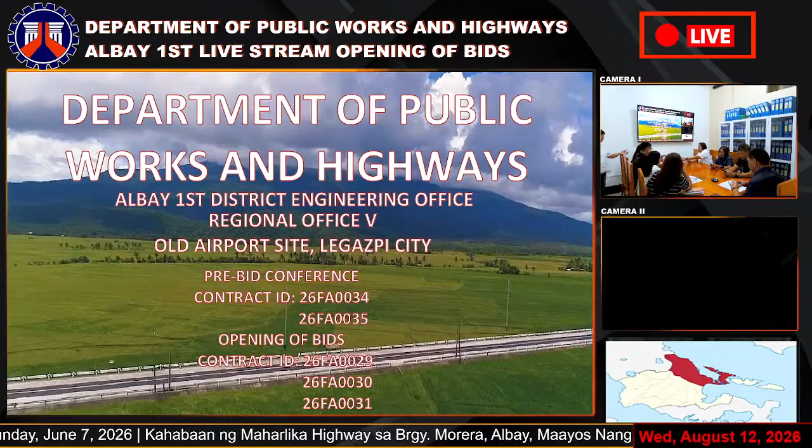Since we already have a quorum, we now start our activity. This is the opening of bid for 3 contract items. Before we open the bid box, let me first read to you the result of the eligibility check.

This is for contract ID 26FA0029. Contract name: CSSP BIP Multipurpose Building, Facilities to Support Services - Construction of Multipurpose Building, Barangay Hall, Barangay San Bernardo, Tiwi, Albay, with coordinates 13.43092 north latitude and 123.65638 east longitude. The location of the contract is at Tiwi, Albay. Based on the evaluation of the legal, technical, and financial capabilities as indicated in the contractor's information as recorded in our computerized registry of contractors for civil works, and the requirements of the above-mentioned contract as indicated in the contract profile submitted by DPWH Albay First District Engineering Office, we find one or a single bidder eligible to participate in the bidding for this contract.

This is Omega Contracting and Development Corporation. So this is the result of the eligibility check, meaning we only have one bidder, a lone bidder. So let me now open the...

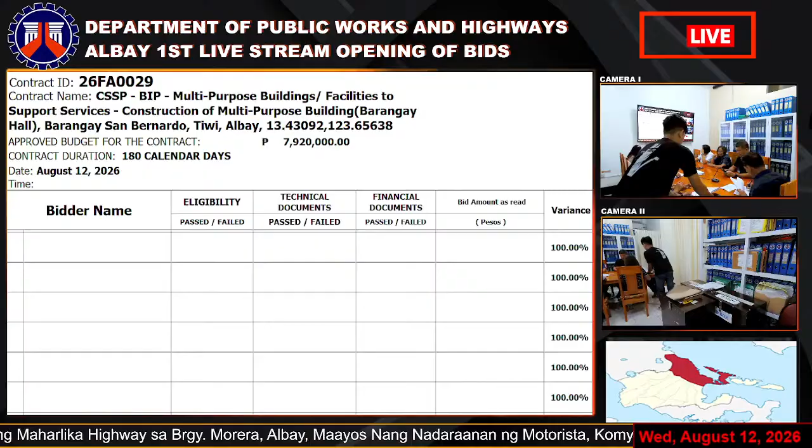We now open and read the technical proposal submitted by the lone bidder. Go ahead, copy of the bidding documents for contract ID 0029 with contract name CSSP BIP Multipurpose Buildings, Facilities to Support Services, Construction of Multipurpose Building, Barangay Hall, Barangay San Bernardo, Tiwi, Albay, coordinates 13.43092 and 123.65638, with the ABC of 7,920,000 pesos. Contract duration 180 calendar days. Date of opening August 12, 2026. Time starts at 10:19 a.m. The lone bidder is Omega Contracting and Development Corporation.

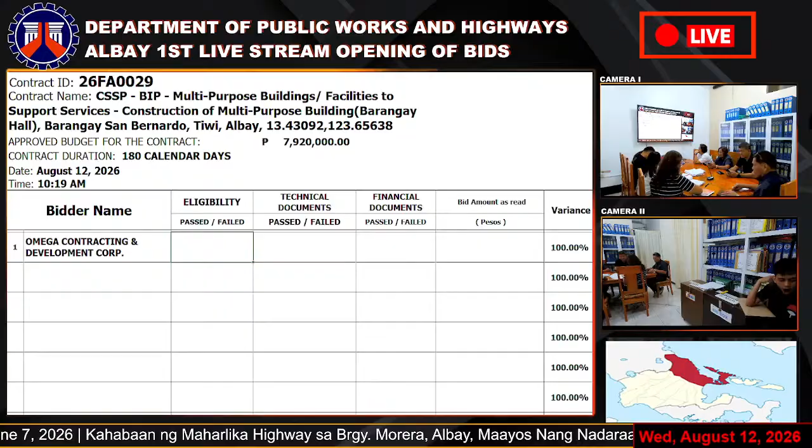PhilGEPS registration. Certificate of Incorporation. Mayor's permit. Tax clearance certificate. PCAB license. AFS and annual income tax return submitted to EFPS. List of ongoing contracts. SLCC with attached notice of award, certificate of completion, certificate of turnover and completion, and acceptance. From BSB, its organizational chart. List of personnel with their qualifications. Key personnel committed to work on the contract.

Project manager Omar C. Octemia and another. Project engineer Maria Lorraine Satueto Octemia, signed and authorized, PRC license and PE accreditation. Materials engineer Kimberly Barsaga, signed and authorized, PRC license and ME accreditation. Safety officer Christian J. Opemia, signed and authorized with certificate. Foreman Arnel Montuya.

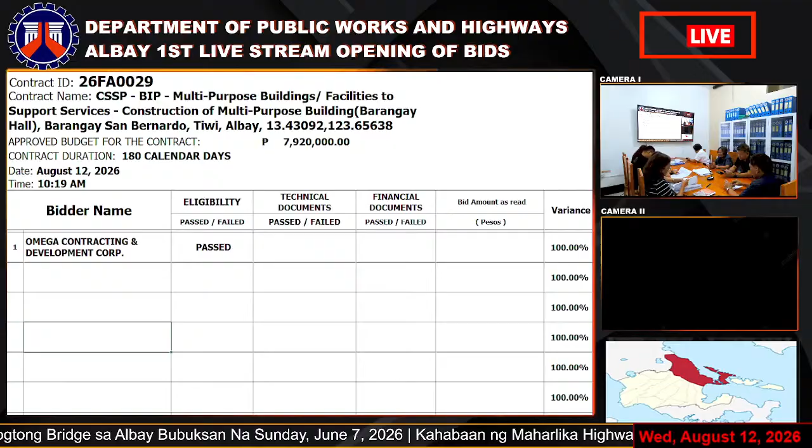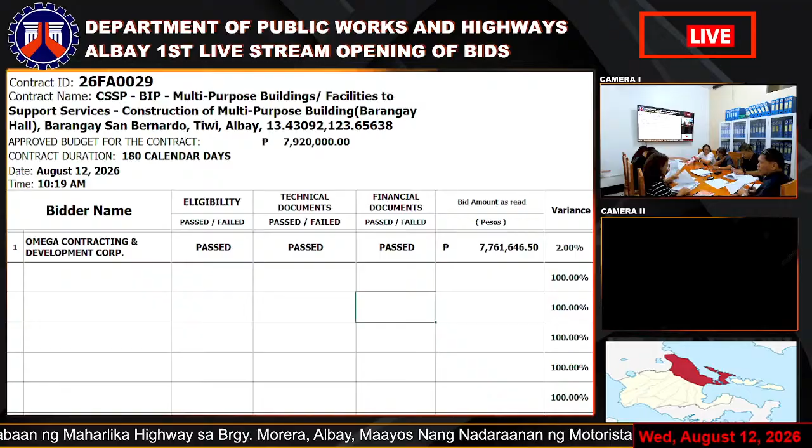Again, the result as read for this contract is still subject to further bid evaluation and post-qualification. So we now continue opening the second contract, Contract ID 26FA0030.

Let me read to you first the result of the eligibility check for this contract. Contract ID number 26FA0030, contract name OO1 Network Development Program, Road Widening, Secondary Road, Daang Maharlika Junction, Legazpi, Santo Domingo, Tabaco, Camarines Sur Boundary Road, K0564 plus 454 to K0565 plus 000. Location of the contract is Malinao, Albay.

Based on the evaluation of the information about legal, technical, and financial capabilities as indicated, the contractor's information of the bidders as recorded in our computerized registry of contractors for civil works, and the requirements for the above-mentioned contract as indicated in the contract profile submitted by DPWH Albay First District Engineering Office, we find 3 bidders eligible to participate in the bidding for the contract: Number 1, Sunro Builders Incorporated; Number 2, RMH Construction and Supply; and Number 3, 8AR Construction Development Corporation.

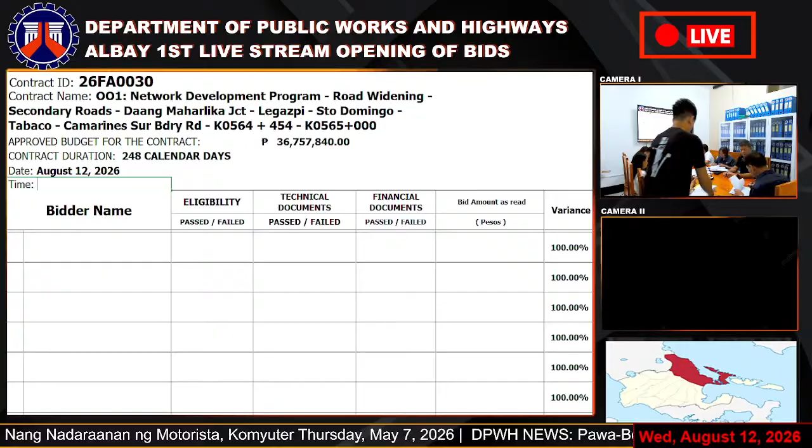So let us now open and read the first envelope. Ma'am Cha, go ahead po. Yes, sir, thank you. Opening of the bidding documents for the contract ID 26FA0030.

For the contract name OO1, Network Development Program, Road Widening, Secondary Roads, Daang Maharlika Junction, Legazpi, Santo Domingo, Tabaco, Camarines Sur Boundary Road, K0564 plus 454 to K0565 plus 000, with an ABC of 36,757,840 pesos. Contract duration 248 calendar days. Date of opening August 12, 2026. Time starts at 10:29 a.m.

First bidder is RMH Construction and Supply. From JEPS Industry: DTI, Mayor's Permit, Tax Clearance Certificate, AFS, Annual Income Tax Return submitted to EFPS, List of ongoing contracts, SLCC with attached notice of award, NTP, contract agreement, final acceptance, inspection report, COC, and certificate of acceptance. Form bid as D, signed and notarized. Organizational chart, list of personnel with qualification data, affidavit of commitment to work on the contract. Project Manager Hannah May Espedido, signed and notarized.

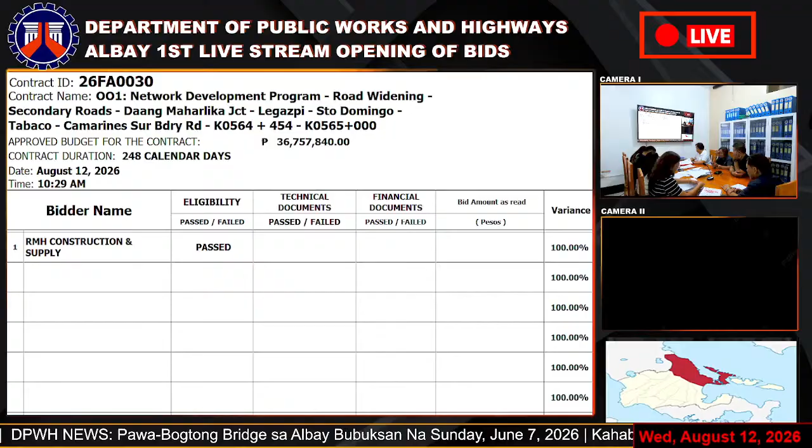Assigned to the contract, all owned and under lease, with proof of ownership. Batching plant accreditation, lease contract agreement, DO1, ADO11, or 1 Omnibus, signed and notarized. ISO certificate. NFCC signed, DO9 signed, affidavit of disclosure of no relationship, integrity pledge, statement declaration. Other technical documents submitted by RMH Construction and Supply for contract ID 26FA0030.

Next bidder is 8AR Construction and Development Corporation. DTI registration, Certificate of Incorporation, Mayor's Permit, Tax Clearance Certificate, AFS, Annual Income Tax Return submitted to the EFPS, List of ongoing contracts, SLCC with certificate of acceptance, final acceptance and inspection report. Form bid, signed and notarized. Organizational chart, list of personnel with qualification data, statement of availability of key personnel and equipment.

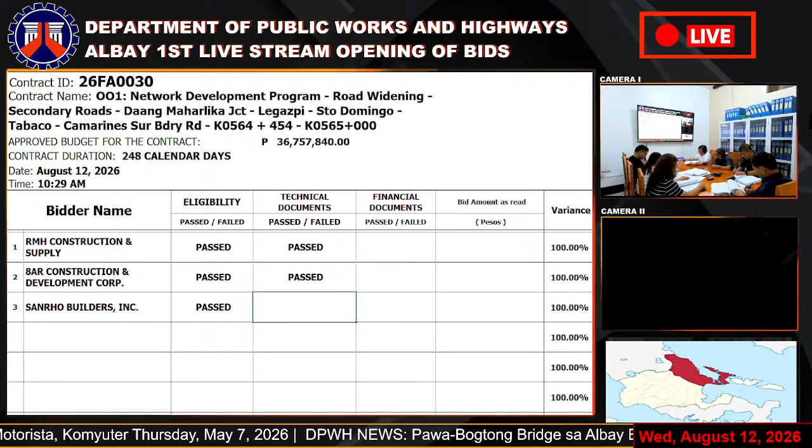Next bidder, the last bidder for this contract, is Sanrho Builders Incorporated. DTI registration, Mayor's Permit, Tax Clearance Certificate, PCAB License, Annual Income Tax Return submitted to EFPS, List of ongoing contracts, SLCC with certificate of completion, certificate of turnover and completion, certificate of acceptance, FCIR.

List of contractors, major construction and laboratory equipment assigned to the contract, owned and under lease, with proof of ownership. Lease agreement of batching plant accreditation. Omnibus, signed and authorized. Secretary's certificate, ISO certificate, GIS, NFCC signed, DEO9, DEO11. So the technical proposal submitted by Sanrho Builders Incorporated for contract ID 26FA0030 is passed.

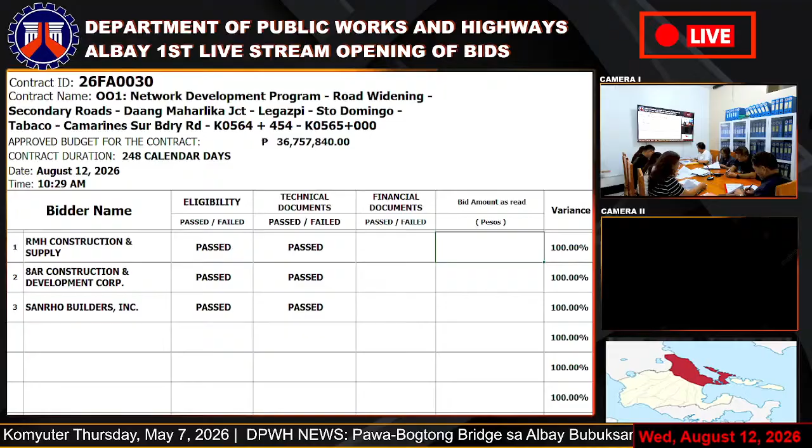Opening of the financial component for contract ID 26FA0030. First bidder, RMH Construction and Supply. Bid form, sign. Bill of quantities, sign. Detailed estimate, unit bid prices. Cash flow with amount of 36,718,638 pesos and 20 centavos.

The financial proposal submitted by RMH Construction and Supply for contract ID 26FA0030 is passed. Next bidder, 8AR Construction and Development Corporation.

Bid form, sign. Bill of quantities, sign. Detailed estimate. Cash flow with amount of 35,895,132 pesos and 43 centavos.

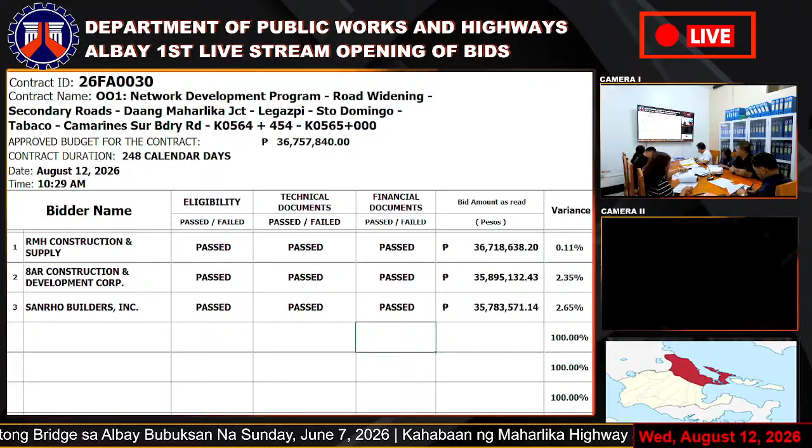There is also a box culvert included. So again, the result as read for this contract, 26FA0030, is still subject for further evaluation and post qualification.

So we now continue with the last contract ID 26FA0031. Before we open the bid box, let me first read to you the result of the eligibility check. This is for contract ID 26FA0031, contract name CSSP, BIP, Multipurpose Building, Facilities to Support Services.

Construction of multipurpose building, covered court, convertible to evacuation center, Barangay Canaway, Malilipot, Albay. Coordinates of 13.319226 north latitude and 123.714339 east longitude. Location of contract is at Malilipot, Albay.

Based on the evaluation of information about legal, technical, and financial capabilities as indicated in contractors' information of the bidders as recorded in our computerized registry of contractors for civil works, the requirements of the above-mentioned contract as indicated in the contract profile submitted by the DPWH Albay First District Engineering Office, we found 2 bidders eligible to participate in the bidding for the contract: number 1, 8AR Construction and Development Corporation, and number 2, Omega Contracting and Development Corporation.

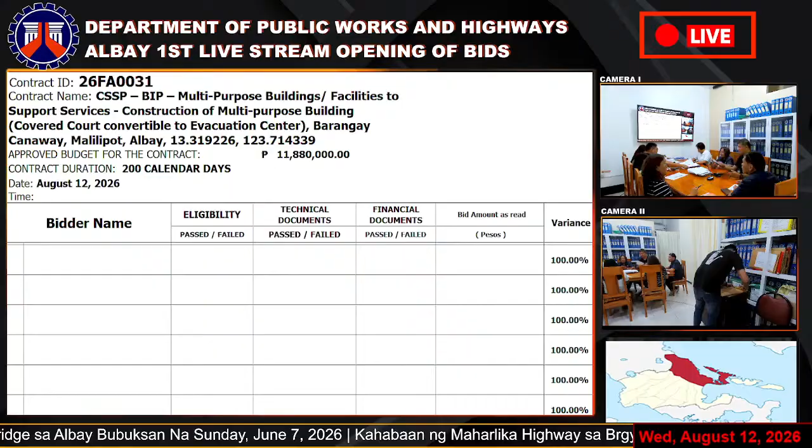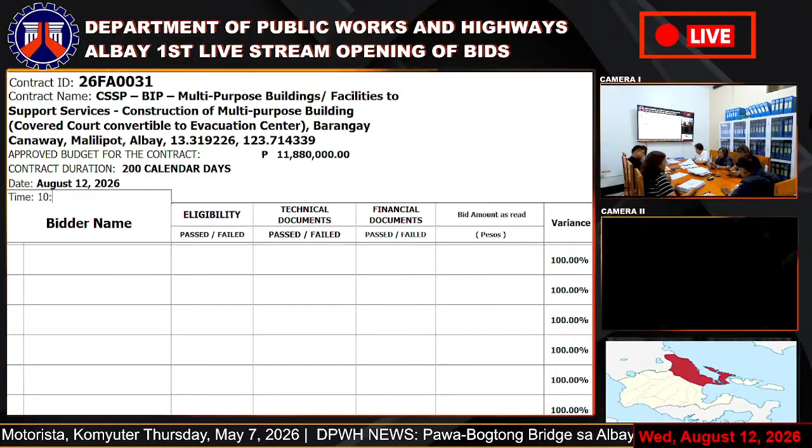Ma'am Shop, please go ahead with the technical. Opening of the bidding documents for contract ID 26FA0031, contract name CSSP, BIP, Multipurpose Buildings or Facilities to Support Services, Construction of Multipurpose Building, Covered Court, Convertible to Evacuation Center, Barangay Canaway, Malilipot, Albay, with coordinates 13.319226 and 123.714339, with ABC of 11,880,000 pesos. Contract duration 200 calendar days. Date of opening August 12, 2026. Time starts at 10:47 a.m. First bidder for this contract is Omega Contracting and Development Corporation.

List of ongoing contracts. SLCC with attached notice of award, certificate of completion, certificate of turnover and completion, and certificate of acceptance, from BSD and authorized.

Organizational chart, list of personnel with their qualification data. Key person affidavit of commitment to work on the contract: project manager Omar C. Camille, sign and authorized. Project engineer Kimberly Barsaga, sign and authorized, with PRC license and PE accreditation.

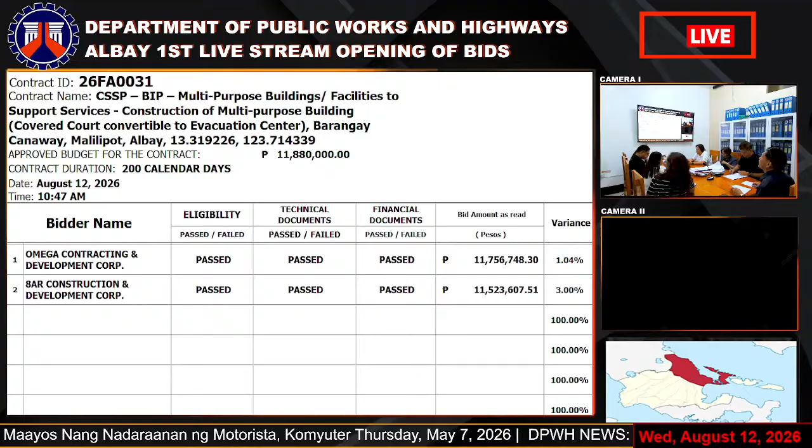So I guess this concludes our opening of bid for today for the three contract IDs 26FA0029, 30, and 31.

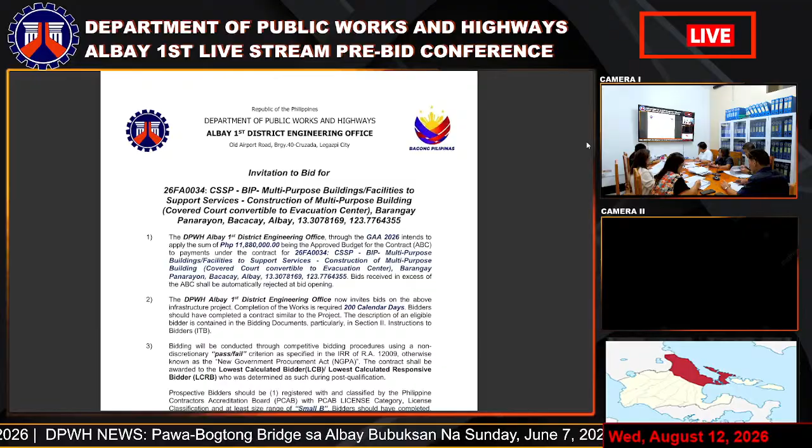Invitation to bid for 26FA0034, CSSP BIP multipurpose building facilities to support services. Construction of multipurpose building, covered court convertible to an evacuation center, Barangay Panarayon, Bacacay, Albay. The DPWH Albay First DEO through GAA 2026 intends to apply the sum of 11,880,000 as the approved budget for the contract. The completion of the work is required within 200 calendar days.

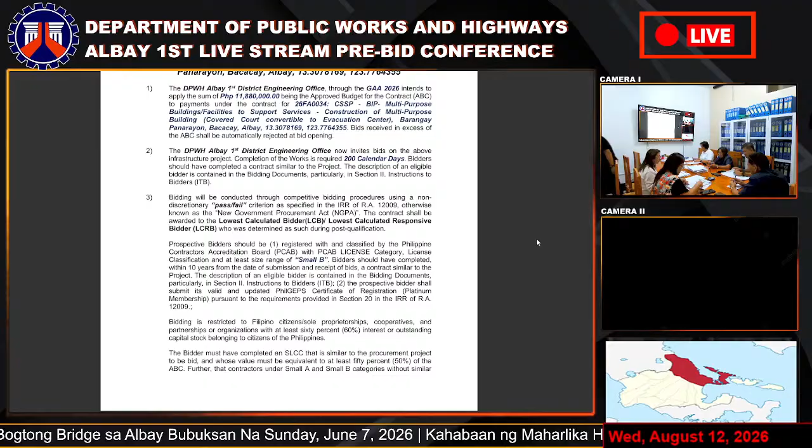The contract should be awarded to the lowest calculated responsive bidder who was determined as such during the post-qualification. Prospective bidders should be registered with and classified by the PCAB, with license category and classification at size range Small B. Bidders should have completed, within 10 years from the date of submission and receipt of bids, a contract similar to the project.

Bidding is restricted to Filipino citizens, or proprietorships, cooperatives, partnerships, or organizations with at least 60% interest or outstanding capital stock belonging to citizens of the Philippines. The bidder must have completed an SLCC similar to the procurement project to be bid, whose value must be equivalent to at least 50% of the ABC.

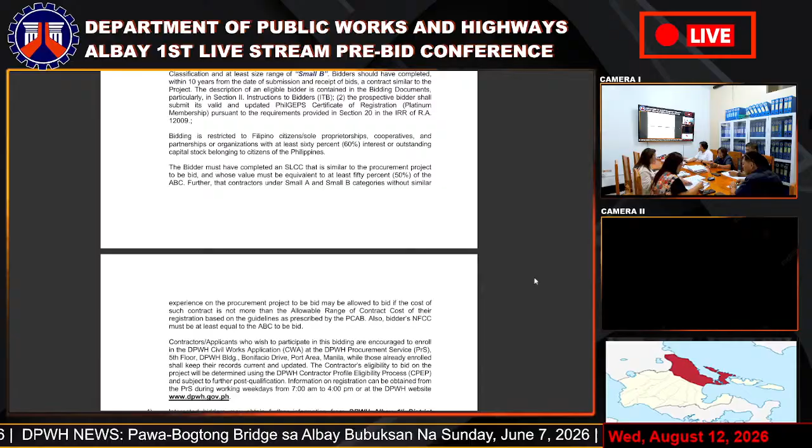Further, contractors under Small A or Small B categories without similar experience on the procurement project to be bid may be allowed to bid if the cost of such contract is not more than the allowable range of contract costs of their registration, based on guidelines prescribed by PCAB. Also, bidders' NFCC must be at least equal to the ABC to be bid.

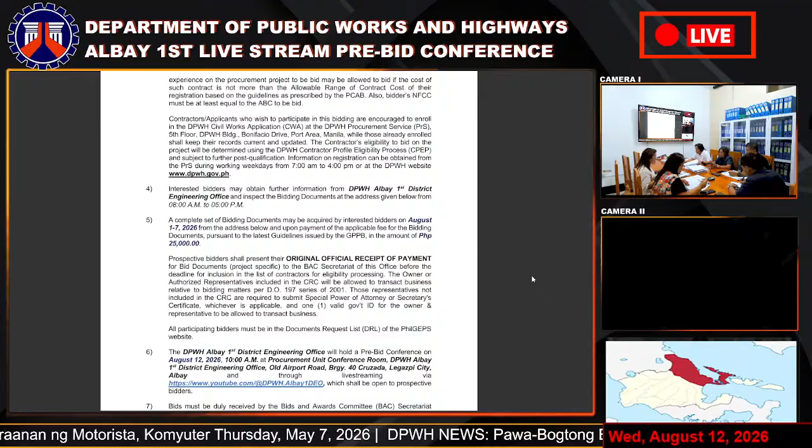Contractors and applicants who wish to participate in the bidding are encouraged to enroll in the DPWH CIVILWORKS application, DPWH Procurement Service, while those already enrolled shall keep their records current and updated. The contractor's eligibility to bid on the project will be determined using the DPWH contractor profile eligibility process and is subject to further post-qualification. Information on registration can be obtained from the Procurement Service during working weekdays from 7 a.m. to 4 p.m., or at the DPWH website.

Interested bidders may obtain further information from DPWH Albay First DEO and inspect the bidding documents at the address given below, from 8 a.m. to 5 p.m. A complete set of bidding documents may be acquired by interested bidders on August 1 to 7, 2026, from the address below, upon payment of the applicable fee for the bidding documents pursuant to the latest guidelines issued by the GPPB, in the amount of 25,000.

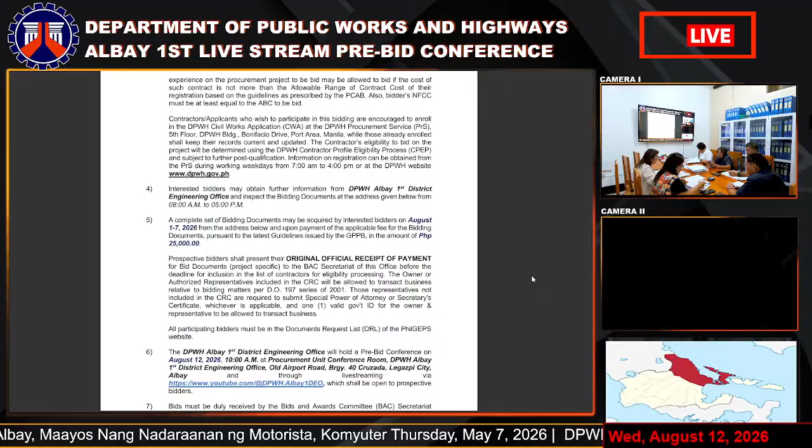Prospective bidders shall present the original official receipt of payment for bid documents to the BAC Secretariat of this office before the deadline, for inclusion in the list of contractors for eligibility processing. The owner or authorized representative included in the CRC will be allowed to transact business relative to bidding matters per DO 197, series of 2001.

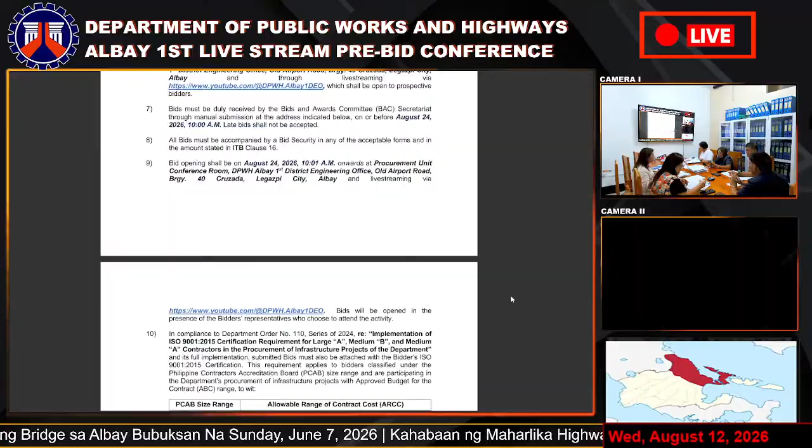Those representatives not included in the CRC are required to submit special power of attorney or secretary certificate, whichever is applicable, and one valid government ID for the owner and representative to be allowed to transact business.

All participating bidders must be in the documents request list of the PhilGEPS website. Bids must be duly received by the Bids and Awards Committee Secretariat through manual submission at the address indicated below on or before August 24, 2026, 10 a.m. Late bids shall not be accepted.

All bids must be accompanied by a bid security in any of the acceptable forms and the amount stated in ITB Clause 16. Bid opening shall be on August 24, 2026, 10:01 a.m. onwards, at the Procurement Unit Conference Room.

In compliance with Department Order Number 169, Series of 2025, Guidelines on the Accreditation and Assignment of Contractors and Consultants Project Engineers, it is hereby ordered to follow full implementation and assign only qualified and competent project engineers of the contractors and consultants in the DPWH projects. Hence, the submitted bids must contain key personnel, particularly project engineer, which are accredited by DPWH.

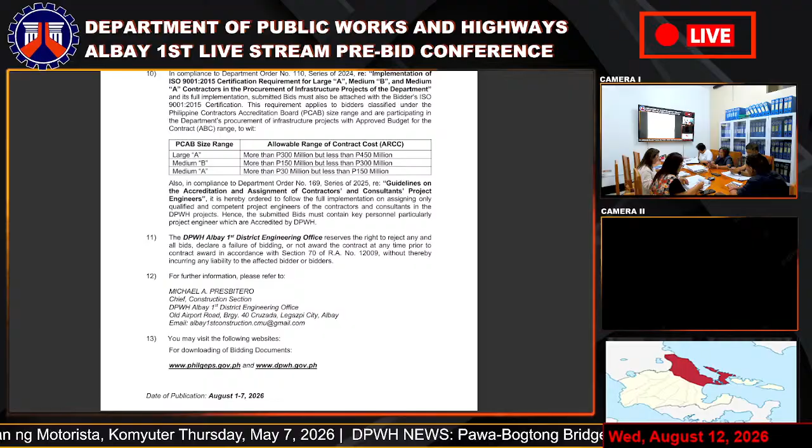The DPWH Albay reserves the right to reject any and/or all bids, declare a failure of bidding, or not award a contract at any time prior to contract award in accordance with Section 70 of RA number 12009, without thereby incurring any liability to the affected bidder or bidders.

For further information, please refer to Michael A. Presbitero, Chief of the Construction Section of DEO.

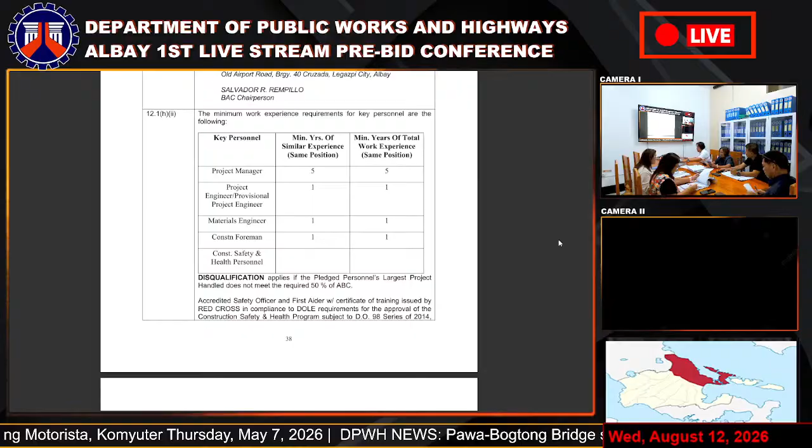The minimum work experience requirements for key personnel are the following: Project Manager 5, Project Engineer / Provisional Project Engineer 1, Materials Engineer 1, Construction Foreman 1. Disqualification applies if the pledged personnel's largest project handled does not meet the required 50% of the ABC.

The minimum major equipment requirements are the following: 1 service truck, 1 bagger mixer, 1 plate compactor, 1 welding machine, 1 concrete vibrator, 1 cutting outfit.

Modifying the list of requirements to be pledged, or non-compliance as to required equipment and number of units in the BDS, is considered an incomplete bid and a ground for disqualification.

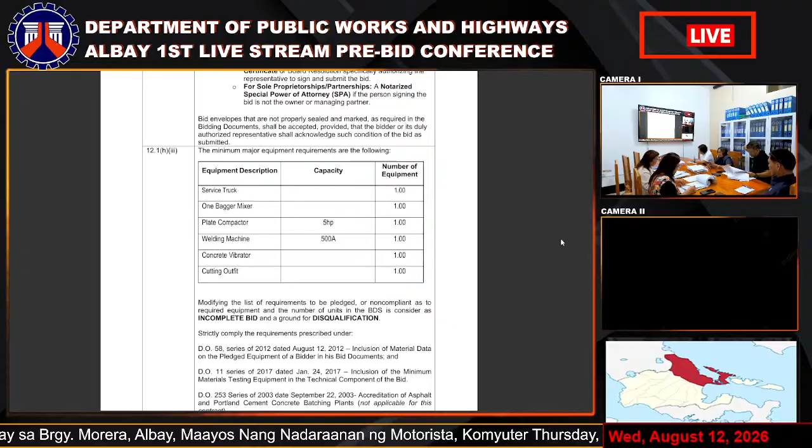Strictly comply the requirements prescribed under D.O. 58 Series of 2012, inclusion of material data on the pledged equipment of a bidder in his bid documents, and D.O. 11 Series of 2017, inclusion of the minimum materials testing equipment in the technical component of the bid.

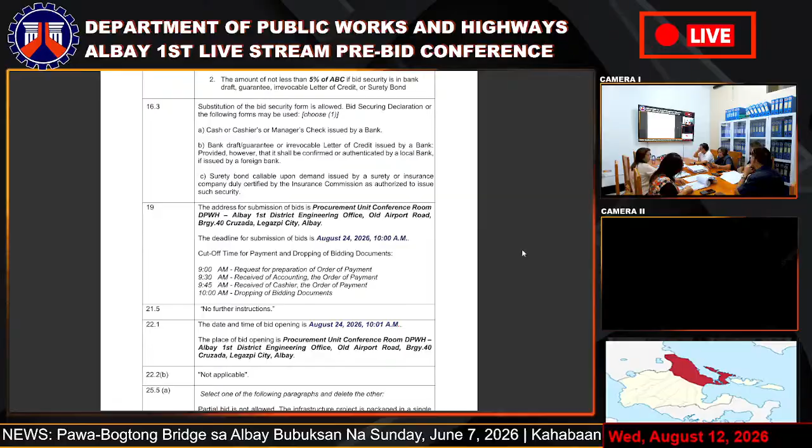Additional contract documents required for the contract: 1, construction methods; 2, construction schedule in the form of PERT-CPM diagram or precedence diagram and bar chart with S-curve or other approved tools of project scheduling and cash flow; 3, manpower schedule; 4, equipment utilization schedule; 5, construction safety and health program; 6, contractors all risk insurance.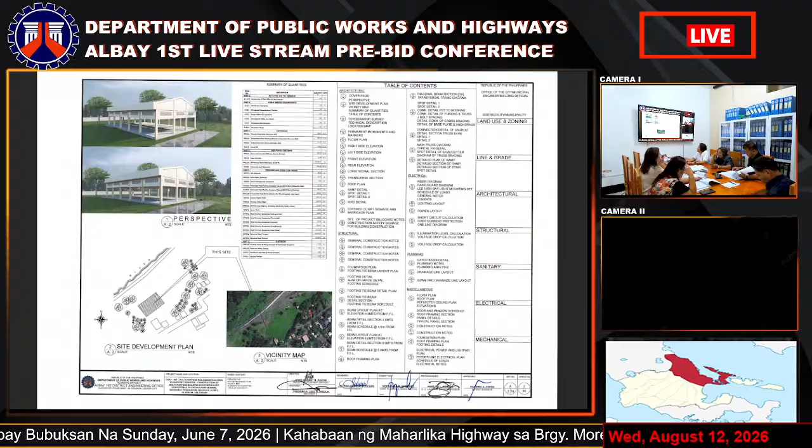For the electrical works: conduits, boxes and fittings, wires and wiring, panel board and main branch breaker, and lighting fixtures. So there's no concrete painting. Next please.

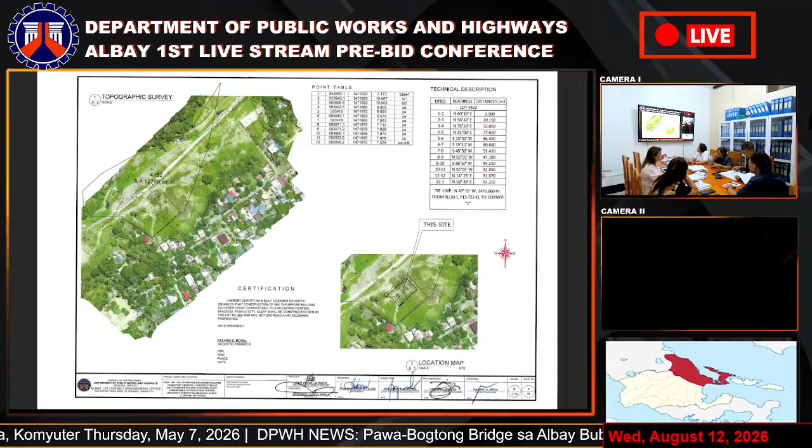So this is the location map. It will be located in Barangay Panarayon. Next.

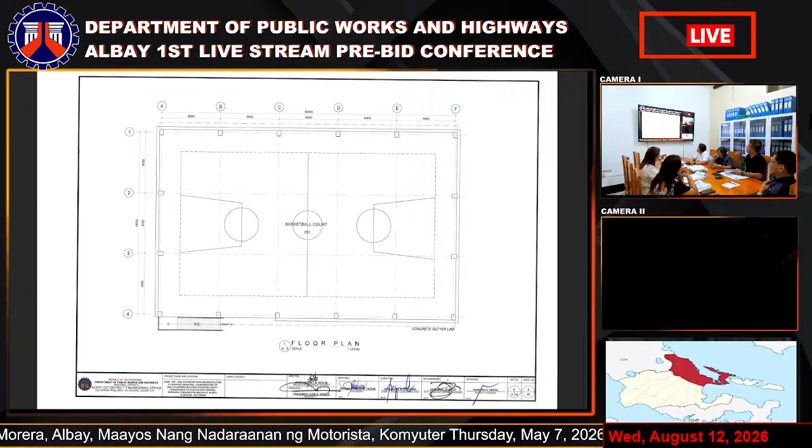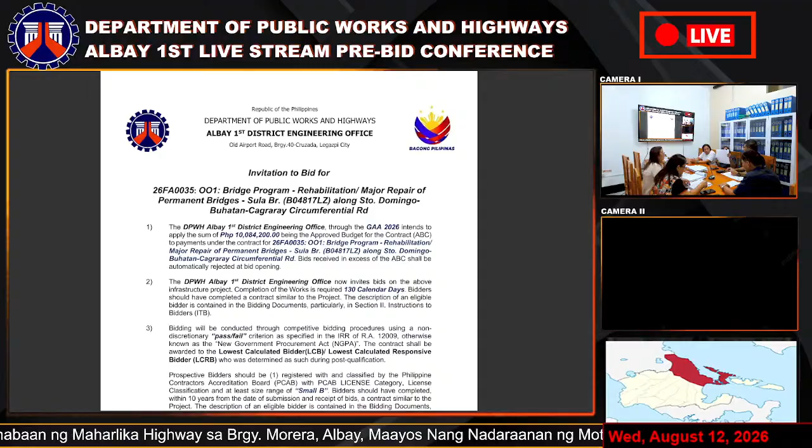The prospective bidder shall submit its valid and updated PhilGEPS Certificate of Registration, pursuant to the requirements provided in Section 20 of the IRR of RA 12009.

Bidding is restricted to Filipino citizens, or sole proprietorships, cooperatives, and partnerships or organizations with at least 60% interest or outstanding capital stock belonging to citizens of the Philippines. The bidder must have completed an SLCC that is similar to the procurement project to be bid, and whose value must be equivalent to at least 50% of the ABC.

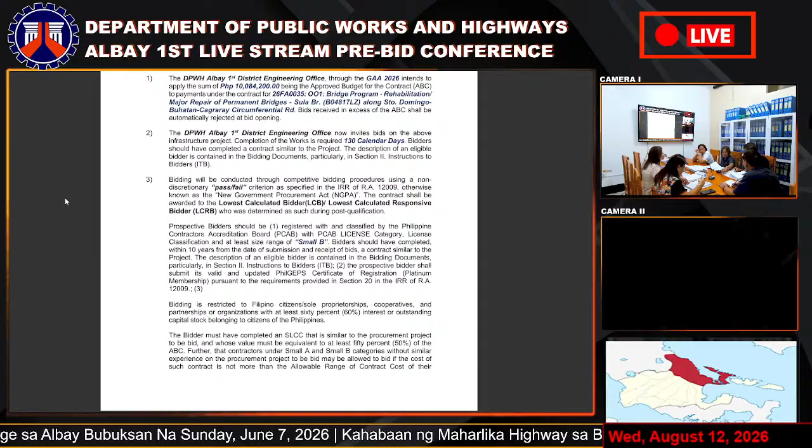Further, contractors under Small A and Small B categories without similar experience of the procurement project to be bid may be allowed to bid if the cost of such contract is not more than the allowable range of contract cost of their registration, based on the guidance prescribed by the PCAB. Also, bidders' NFCC must be at least equal to the ABC to be bid.

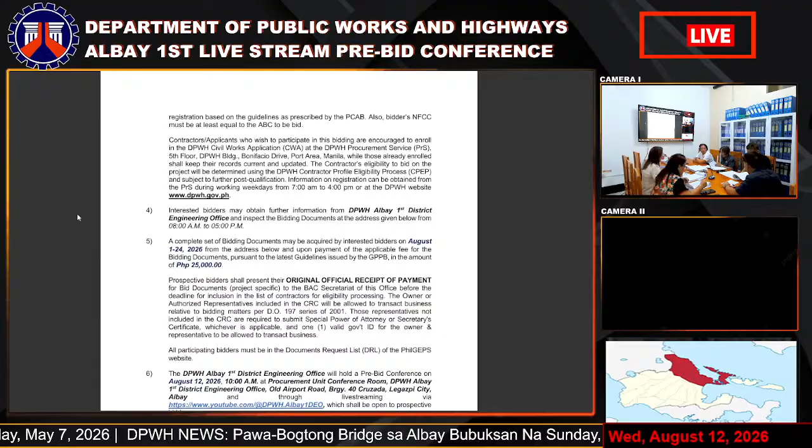Contractor applicants who wish to participate in this bidding are encouraged to enroll in the DPWH Civil Works Application Procurement Service, while those already enrolled shall keep their records current and updated. The contractor's eligibility to be bid on the project will be determined using the DPWH contractor profile eligibility process, subject to further post-qualification. Information and registration can be obtained from the procurement service during weekdays from 7 a.m. to 4 p.m., or at the DPWH website. Interested bidders may obtain further information from Albay First DEO and inspect the bidding documents at the address below from 8 a.m. to 5 p.m.

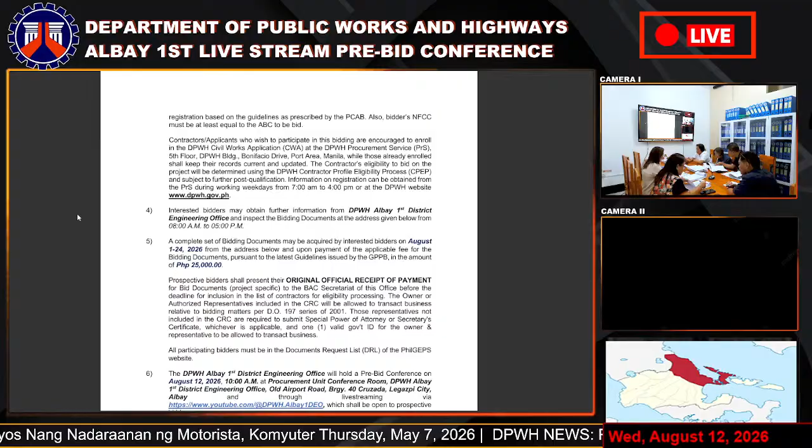A complete set of bidding documents may be acquired by interested bidders on August 1 to 24 from the address given, upon payment of the applicable fee for the bidding documents in the amount of 25,000. Prospective bidders should present their original official receipt of payment for the documents to the BAC Secretariat of this office before the deadline for inclusion in the list of contractors' eligibility processing.

The owner or authorized representatives included in the CRC will be allowed to transact business relative to the bidding matters per DO 197, series of 2001. Those representatives not included in the CRC are required to submit a special power of attorney or secretary's certificate, whichever is applicable, and one valid government ID for the owner and representative, to be allowed to transact business. All participating bidders must be in the documents request list of the PhilGEPS website.

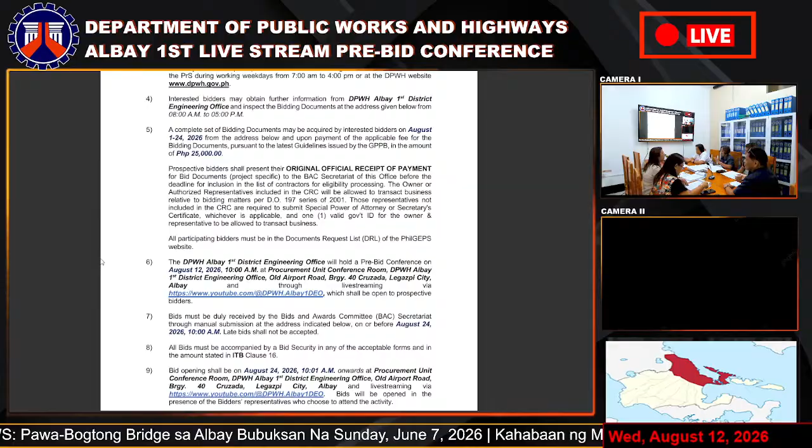Bids must be duly received by the BAC Secretariat through manual submission at the address indicated below on or before August 24, 2026, 10 a.m. Late bids shall not be accepted. Bid opening shall be on August 24, 10:01 onwards, at the Procurement Unit Conference Room, Albay First DEO.

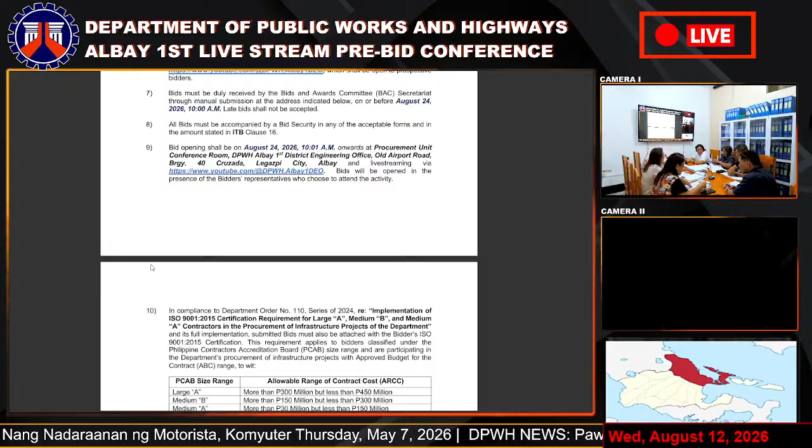In compliance with Department Order Number 169, Series of 2025, Guidelines on the Accreditation and Assignment of Contractors' and Consultants' Project Engineers, it is hereby ordered to follow full implementation on assigning only qualified and competent project engineers of the contractors and consultants in the DPWH projects. Hence, the submitted bids must contain key personnel, particularly the project engineer, which are accredited by the DPWH.

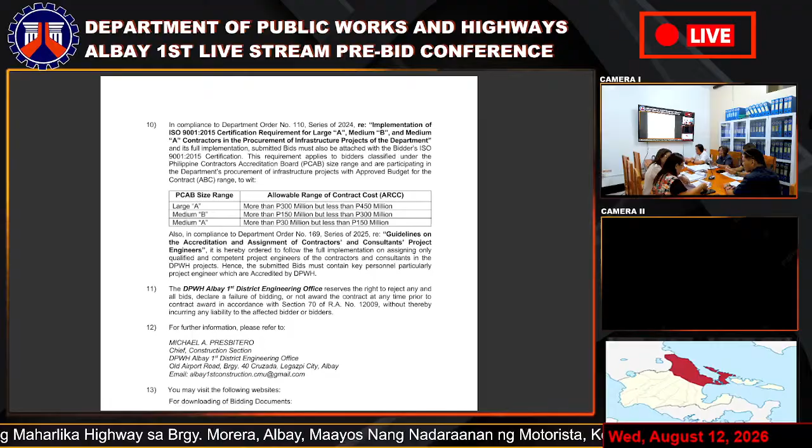The DPWH Albay First DEO reserves the right to reject any and all bids, declare a failure of bidding, or not award the contract at any time prior to contract award, in accordance with Section 70 of RA number 12009, without thereby incurring any liability to the affected bidder or bidders. For further information, please refer to Michael A. Presbitero, Chief Construction Section of Albay First DEO.

The minimum work experience requirements for key personnel are the following: project manager, 5 years; project engineer, provisional project engineer, 1 year; materials engineer, 1 year; construction foreman, 1 year. Disqualification applies if the pledged personnel's largest project handled does not meet the required 50% of the ABC.

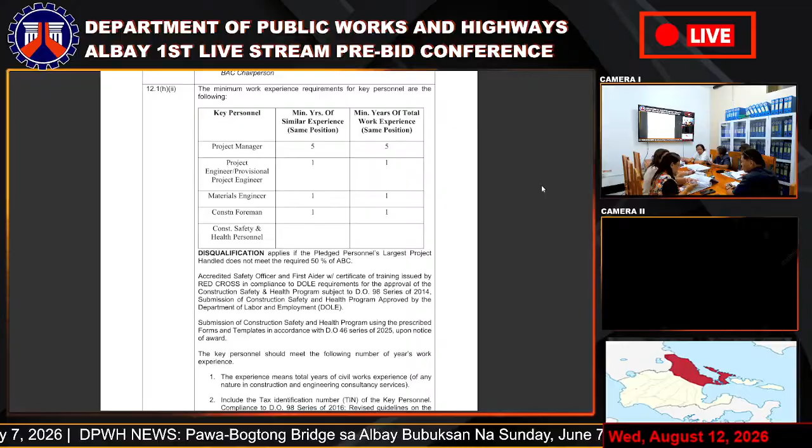The minimum number of equipment requirements are the following: air compressor 1, backhoe 1, cargo truck 1, concrete vibrator 1, crawler crane with bucket 1, dump truck 1, generator set 2, jackhammer 1, bagger mixer 2, welding machine 1. Modifying the list of requirements to be pledged, or non-compliance as to required equipment and the number specified in the BDS, is considered an incomplete bid and a ground for disqualification.

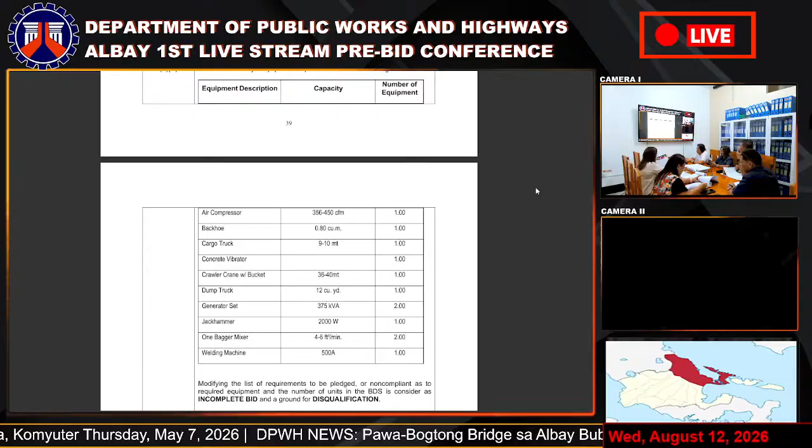Strictly compliant with requirements prescribed under DO 58, series of 2012: inclusion of material data on the pledged equipment of a bidder in its bid documents. DO 11, series of 2017: inclusion of the minimum materials testing equipment in the technical component of the bid.

Additional contract documents required for the contract: 1. Construction methods. 2. Construction schedule in the form of CPM diagram, precedence diagram, and bar chart with S-curve, or other approved tools of project scheduling and cash flow. 3. Manpower schedule. 4. Equipment utilization schedule. 5. Construction safety and health program. 6. Contractor's all-risk insurance. So thank you so much, Ma'am Sula.

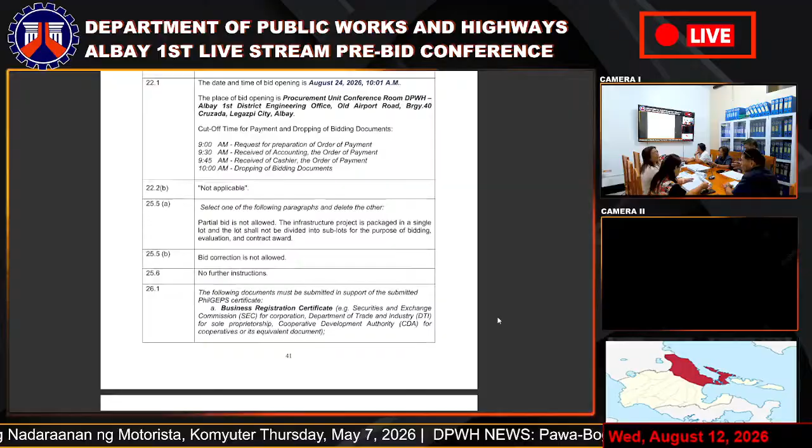Okay, good morning again. For the detailed engineering design plan for 26FA0035-001, Bridge Program Rehabilitation/Major Repair of Permanent Bridges, Sula Bridge, with Bridge ID B04817LC along Santo Domingo, Buhatan-Cagraray Circumferential Road. The station limit is the bridge station limit of K0557 plus 556, with a total bridge length of 264.7 meters and bridge width of 6.9 meters.

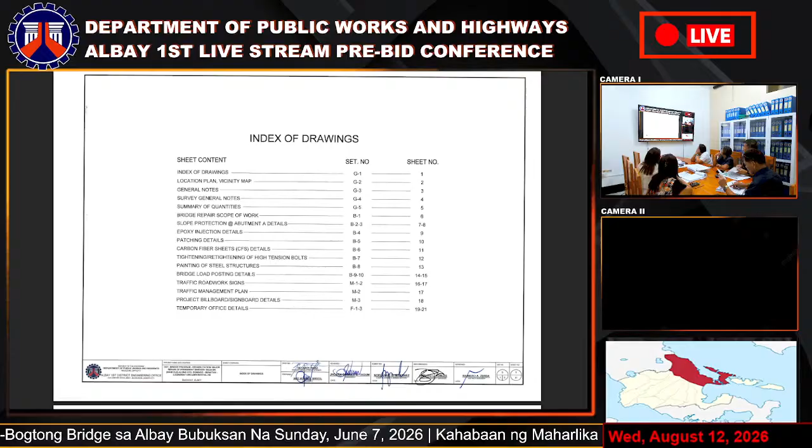Next, please. So for the index of drawings, please take note we have 21 sheets. Next. So for the location map and the vicinity map, it is the Sula Bridge connecting the mainland Luzon to the Cagraray Island.

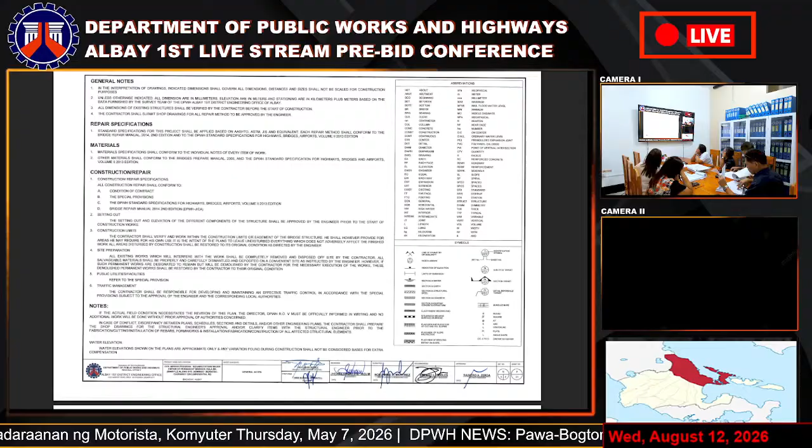So, general notes for the construction repair of the bridge. Please take note of these general notes because included here is the methodology and sequence of work for the bridge repair.

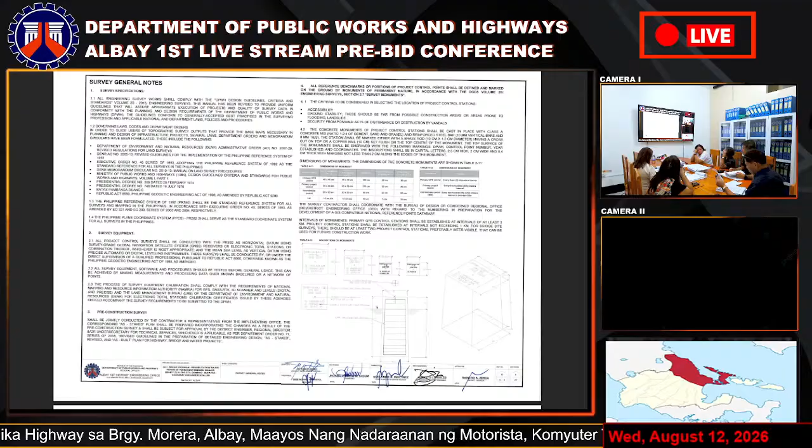For the monumenting, please take note, during construction, since the bridge only has monument and markers, this monument will only mark the items done in the project. The majority of the repair is underneath.

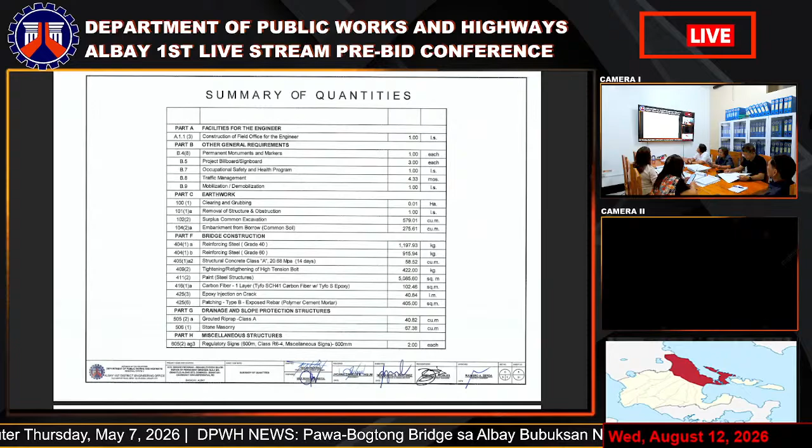For the summary of quantities, the pay items that the contractor will do are for the facilities of the engineer, construction of field office for the engineer, other general requirements, permanent monuments and markers, project billboards and signboards, occupational safety and health program, traffic management, mobilization and demobilization, for earthwork: clearing and grubbing, removal of structure and obstruction, surplus common excavation, embankment from borrow common soil. For the bridge construction or repair: reinforcing steel grade 40, reinforcing steel grade 60, structural concrete class A with 20.68 megapascal, 14 days curing.

Tightening and retightening of high tension bolts, paint for the steel structures, carbon fiber 1 layer with specification Tyfo SCH41, carbon fiber with Tyfo S epoxy.

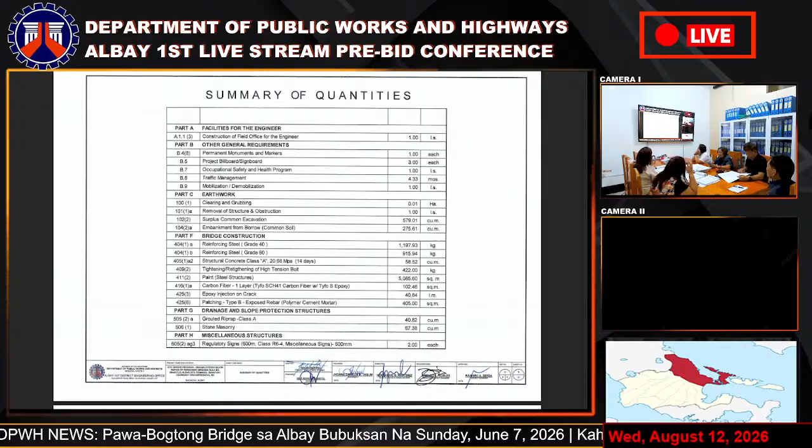Then, epoxy injection and crack patching type B, exposed rebar using polymer cement mortar. For drainage and slope protection structures: grouted riprap class A, stone masonry. For miscellaneous structures: regulatory sign 600mm class R6-4, miscellaneous sign 600mm.

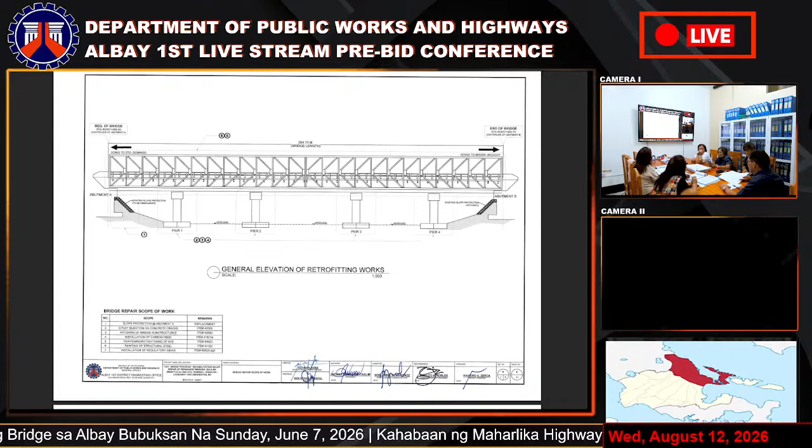Okay, next please. For the general elevation retrofitting works, you can see highlighted here abutment A, abutment B, and piers 1, 2, 3, 4. So for the bridge repair work, scope of work includes slope protection replacement of abutment A, epoxy injection of concrete cracks, patching of bridge substructure, installation of carbon fiber, tightening of HTB (high tension bolt), and painting of structural steel, and installation of regulatory signs.

Next, this is the general plan for the slope protection at abutment A. This is the elevation plan for the slope protection also at abutment A. You can see the details here.

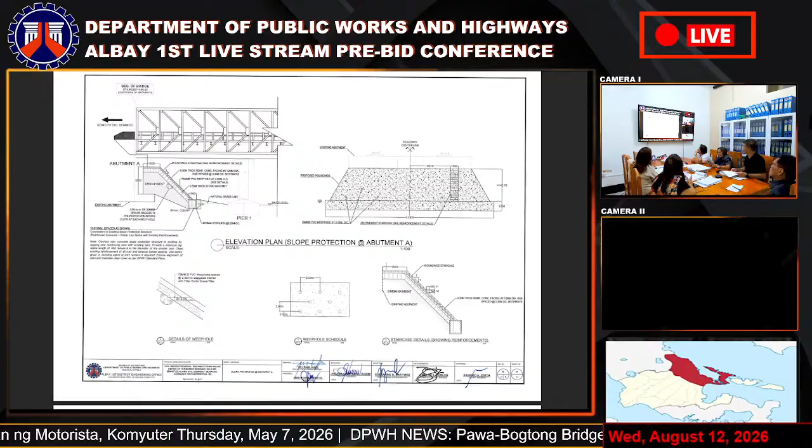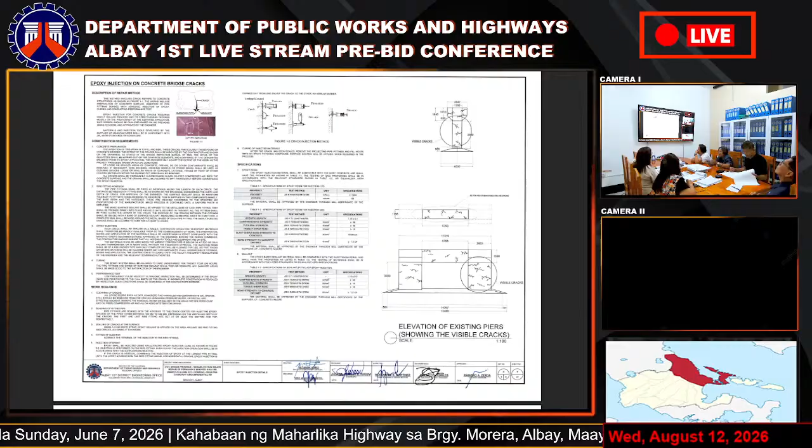Next, this is the methodology for the elevation of existing piers. Please take note of the epoxy injection of concrete bridge cracks at the upper left. There are the construction requirements and the description of the repair method.

You can also see here, if prospective bidders want to check, you can download it here at PhilGEPS. You can see the work sequence and the requirements for the epoxy needed.

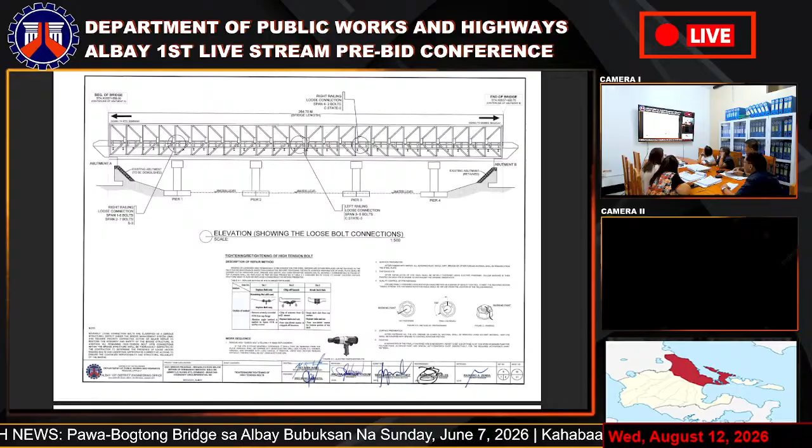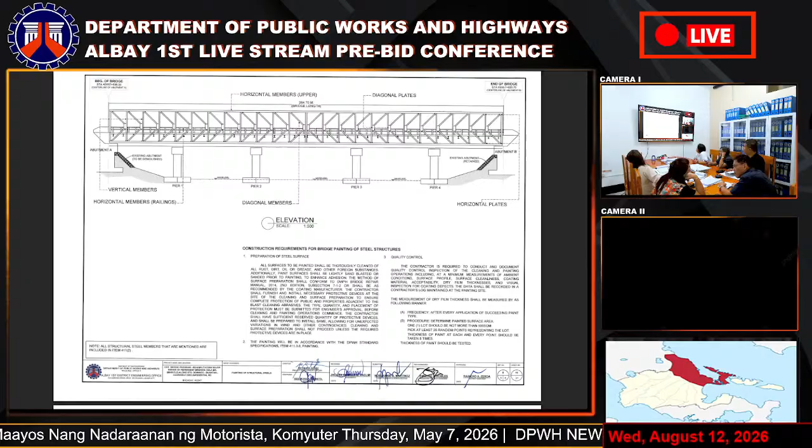For the elevation of the construction requirements, bridge painting of steel structures. These are the steel members of the bridge, since the Sula bridge is a steel bridge. This is what we also need to maintain.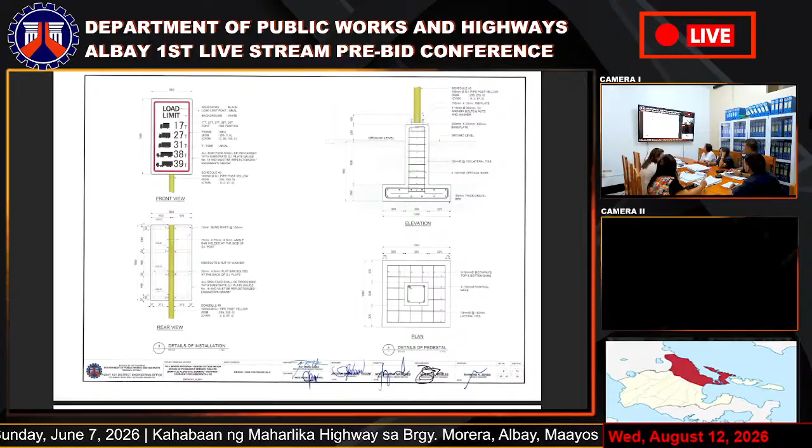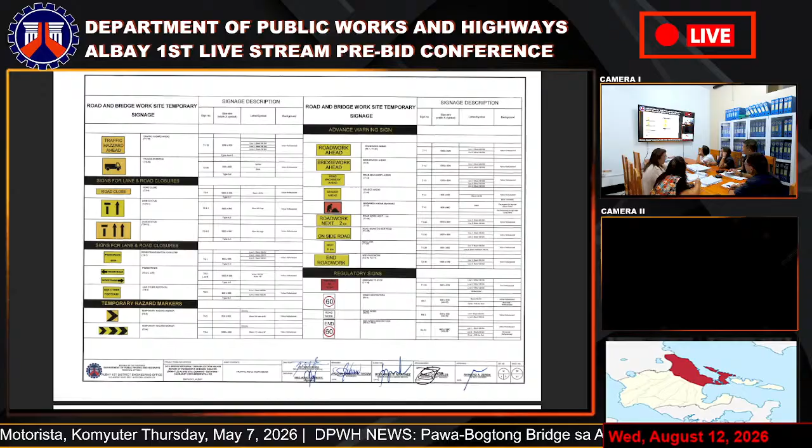For the traffic management, these are what we will use for road safety. Please take note of the road safety signage that we need to install. The road traffic safety signages should be reflectorized and according to size.

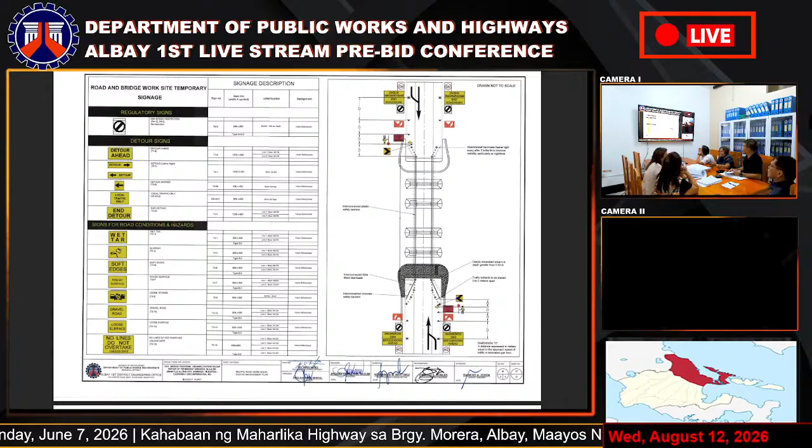Next, this is the traffic management plan for the repair of the bridge. Please take note of the setup, how the contractor should set up the traffic management plan.